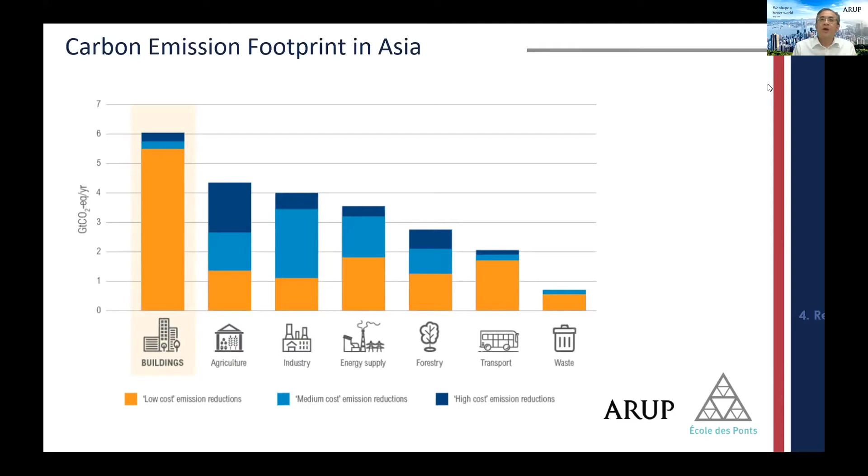So it's not difficult to imagine that in a city in this world, you have this kind of composition of the carbon footprint. Although industry and also agriculture, to some extent, form some part of the footprint, still for those more developed economies, buildings will be the key sector that emits a lot of carbon. So if we want to help curb and reduce carbon emissions, buildings will still be the key focus.

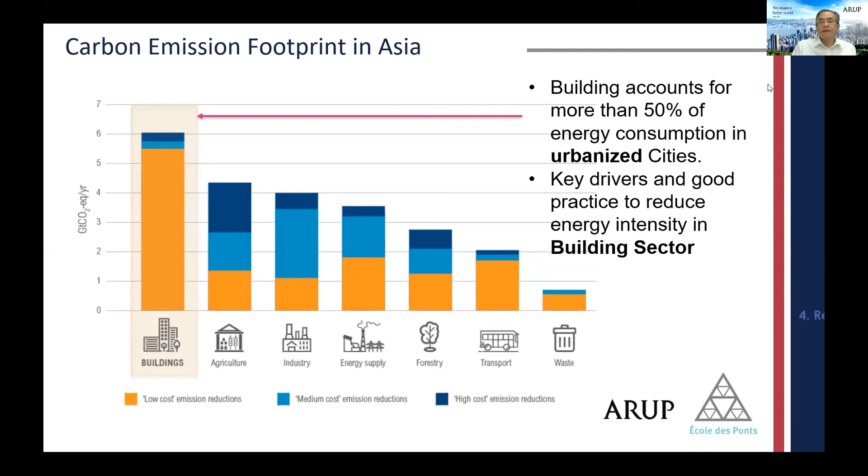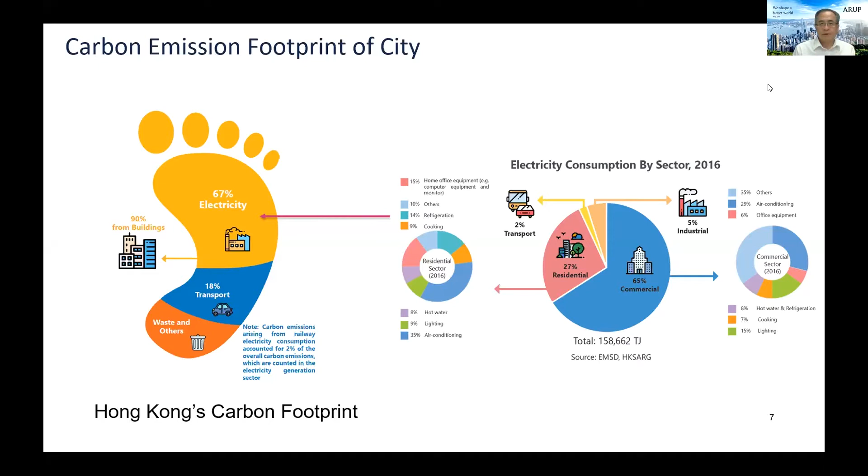And in particular, if you look closer at electricity consumption, you can find that commercial buildings actually consume a significant amount of our electricity, because for an international city like Hong Kong, there is a lot of business activity happening in offices, and also a lot of activity in shopping malls. That's why commercial facilities actually account for over 60% of the total electricity. So if you want to solve the problem, we have to look into this broad perspective, and also the inequalities in how this electricity is being used within the building sector.

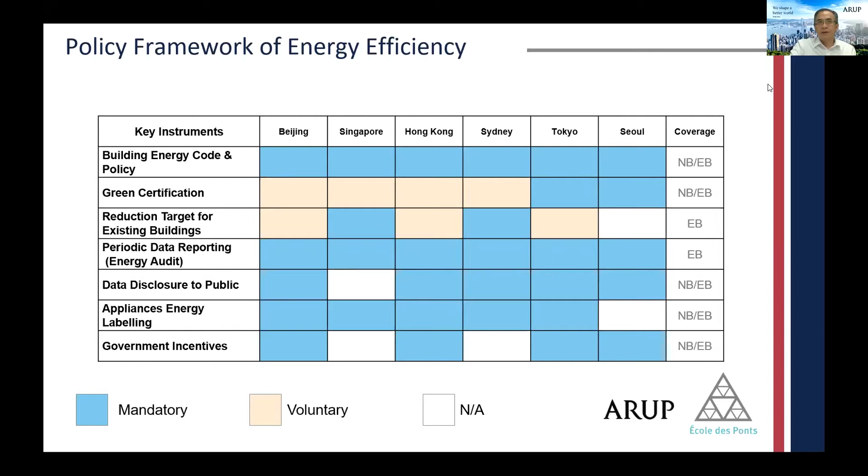That's why in this region most governments have developed policy on energy efficiency. This is a summary of the instruments they typically use, including regulations, market green certifications, setting targets for existing building reduction, and, becoming more and more popular, incentives and disclosure of energy use from buildings and at the corporate level, in order to create peer pressure for the operators to behave. You can see in the table here that different cities in this region use different methods. Some use mandatory, some use voluntary, to help implement these initiatives within the energy efficiency frameworks.

So basically, this shows the overall framework of building energy efficiency. We use, of course, building energy codes to control the way we build our built environment, and also the systems and subsystems within the building. We also incentivize the market to create green building measures, and more recently, for existing buildings in particular, to create a market whereby building operators or building energy operators have the chance to invest in order to retrofit and commission the building and maintain it to a very high standard.

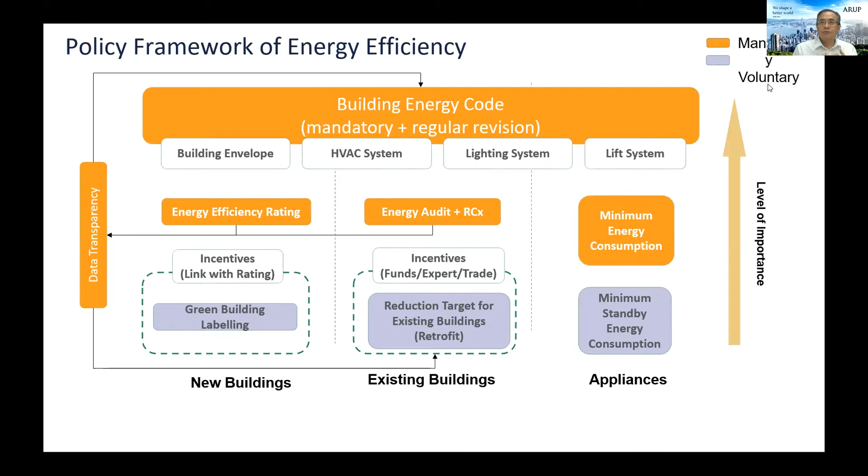Bear in mind that in this region, over 60%, over 80% of buildings are below the current energy standard. So we still have a long way to go to make these existing buildings perform as well as the new buildings. These are some details on the instruments that have been used in leading cities in this region.

In Japan in particular, you probably have heard that they use CASBEE to help plan and design green buildings. They use the Top Runner program to encourage building owners to reduce carbon through voluntary disclosure of performance, and more importantly, the Tokyo Metropolitan Government introduced a cap and trade program whereby buildings can trade the energy savings they generate from the initiative. It actually proved to be very effective. We were told by the local authorities that over 30% of energy has been reduced because of this cap and trade program.

In Singapore, of course, they also take quite proactive measures to control energy and building design. Green Mark is a green building certification exercise. They also have a very stringent energy code, which helps to reduce the energy used by new buildings. And more recently, they introduced the super low energy building scheme, where they encourage building owners to take extra measures to improve existing building performance.

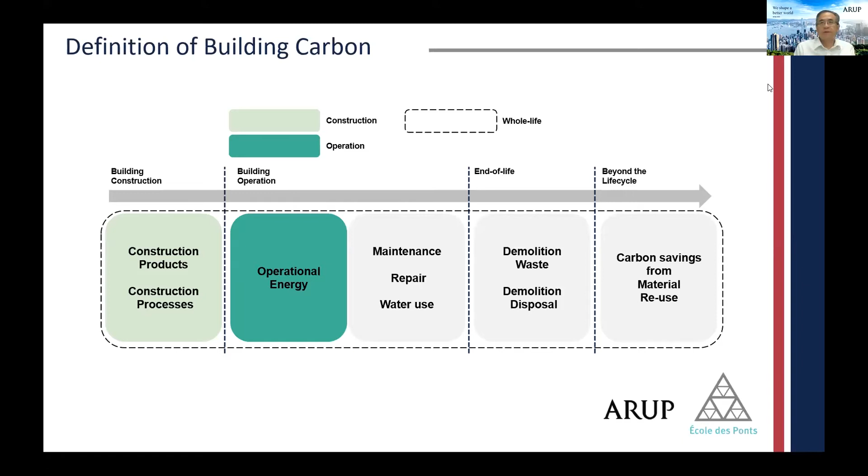But we still need to face the fact that around 50% of the carbon is embedded in the materials we use. So when we talk about net zero, we are not only talking about offsetting the operating stage. We have to think about the embedded carbon as well. So overall, we are talking about a decarbonization process to the state where we create what we call an energy positive building, meaning that the energy generated throughout the operating stage also has to offset the embodied carbon in the materials.

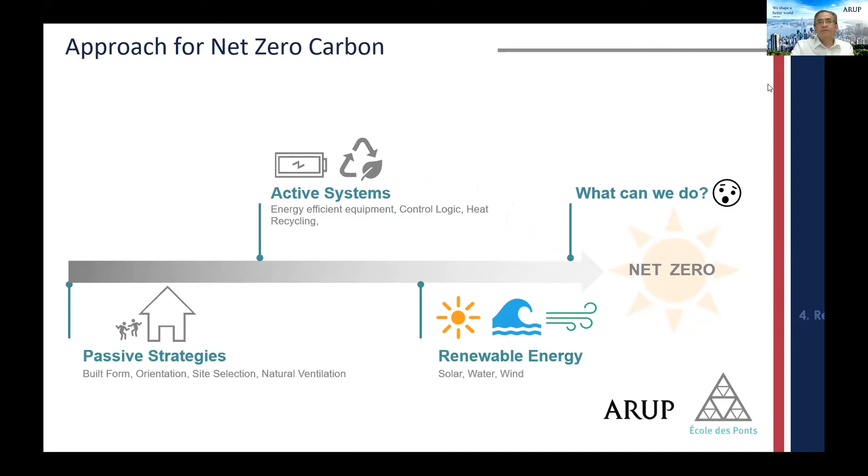So there are a lot of methods and standards being developed, as I said, in this region and worldwide, to help designers, engineers, and building operators take this on board in the design and operation of the system, including passive strategies, active systems, and renewable systems. But there's something we have to work more on in order to achieve that. It's shown by this diagram that we have to work from both ends.

First, we have to reduce. That's very important, and based on science-based calculations, we need to reduce at least 60% of our current operating energy demand across the whole building sector, be it residential or commercial. So it's actually very challenging. Bear in mind there is still residual energy needed to provide the basic necessities that safeguard the health and well-being of people. So that 60% is very challenging.

But on the other hand, equally challenging is to increase renewable energy supply. If you look at the built environment, in particular developed cities like Hong Kong, Singapore, Tokyo, Taipei, or Beijing, it's very difficult to install renewables in the city. So we have to find some other way, and later I'll show you an idea we generated recently to maximize the available provisions to create renewable energy.

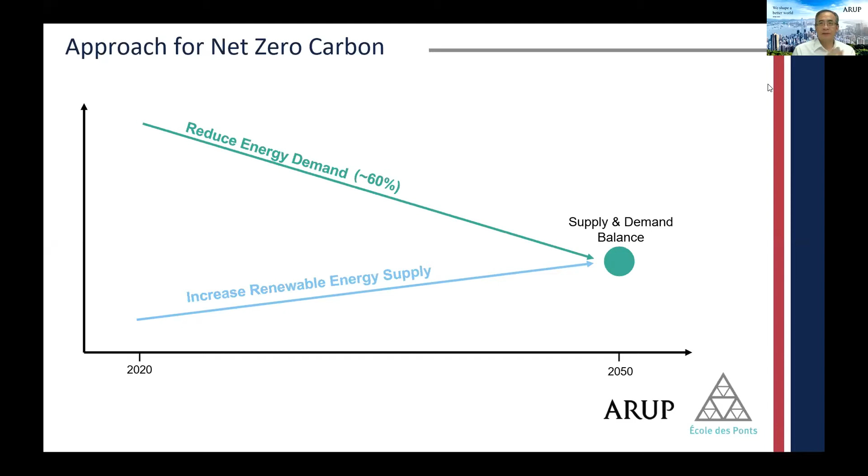So the end game is that by 2050 we will approach a balance between the supply and demand efforts in order to achieve the zero carbon objectives. So just quickly, let me give you some idea of what has been done in the past decades on this zero carbon front. As I said, zero carbon building is not new in this region.

In fact, this is the first zero carbon project I worked on, 10 years ago, for Samsung. The company built this demonstration project called Green Tomorrow, to demonstrate the technology to achieve zero emissions, both in energy and in waste, solid waste and liquid waste.

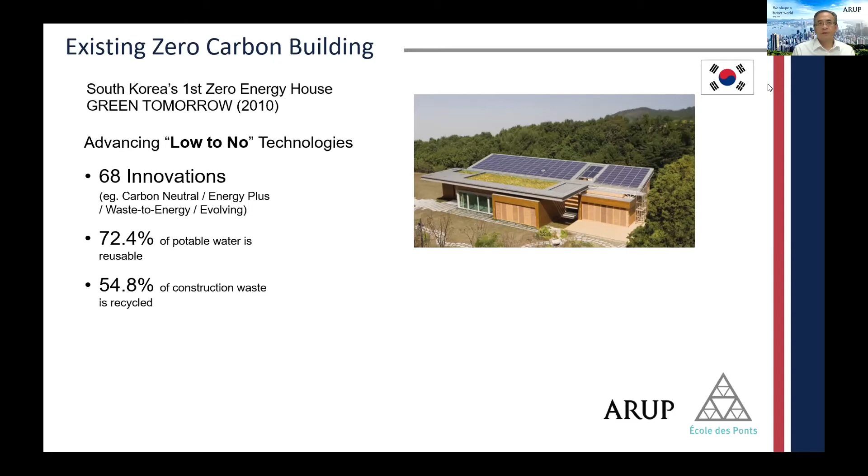So that's why in design we try where possible to maximize the use of passive design, to use natural ventilation during the mid-seasons, and in the winter seasons to introduce as much solar as possible into the interior space. And on the active system, we use a ground source heat pump to provide heating energy during the winter time.

So overall, the building can actually achieve zero carbon performance with the aid of PV and also a small wind turbine, to achieve zero carbon operations year round. But I think the trick is still that we need to bring down, as I said, the demand. Without this kind of exercise, it is hardly possible that the PV on the roof itself can provide enough electricity to drive all the systems needed to decarbonize the residual energy use.

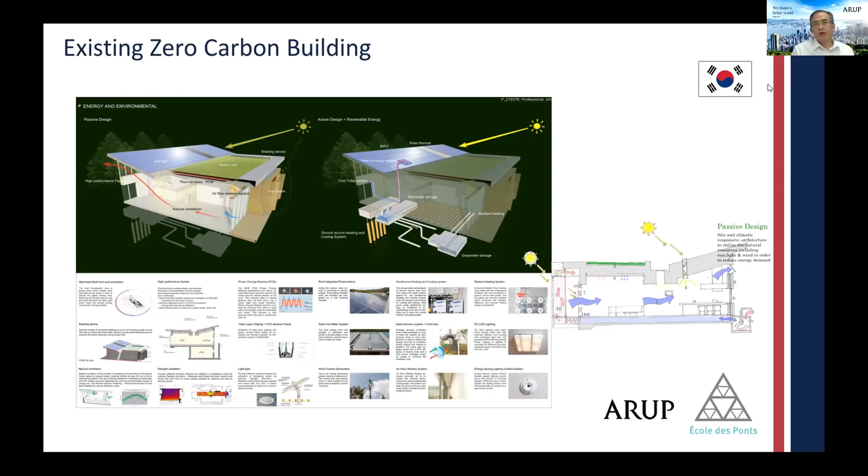This is another project done almost 10 years ago in Hong Kong. This is a low-rise office building. We call it ZCB, Zero Carbon Building, in Hong Kong. Here again, we want to move from the concept of low carbon. As I said, the government here has introduced a lot of low carbon requirements and also low carbon design adopted in the industry. But if we want to move down to zero carbon, we have to work further on that.

In particular, we actually have adopted behavior change. I think that's important. In the old days, when air conditioning was not that popular, we used a lot of natural ventilation. But we find it quite difficult these days to promote this because people's behavior or culture has changed. In order to achieve zero carbon, we have to reverse that process.

So that's why in this particular project we introduced high volume low speed fans in order to provide thermal comfort, and to decarbonize the whole thing. Because the facility is a place for offices and also exhibitions, we have to get a continuous supply of electricity. So for that we rely on biodiesel, biomass kind of energy. We actually introduced the first, I would say, biodiesel powered by waste cooking oil to provide the energy for that.

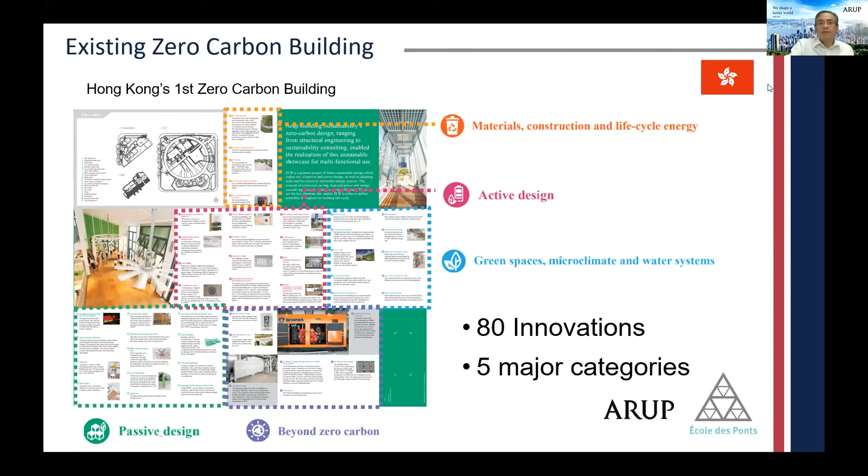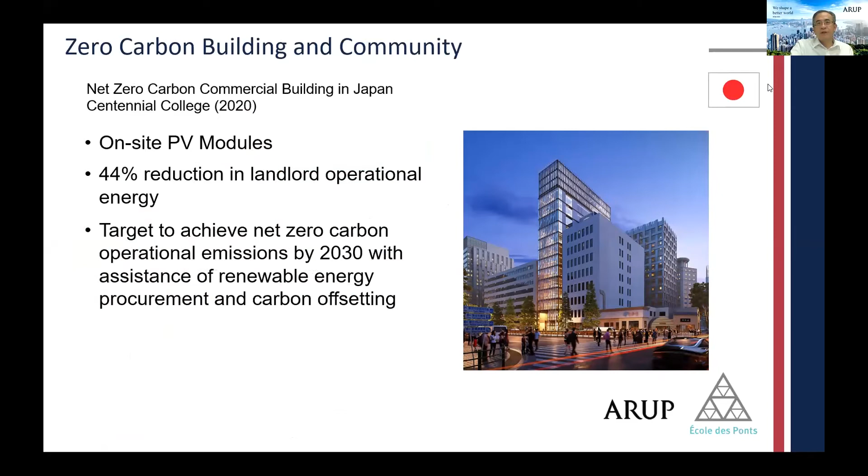So in total, the PV on the roof provides around 30% of energy, whereas the remaining 70% of energy is provided by the biodiesel or bio energy. Another zero carbon building is in Japan. In the interest of time, I'm not going into details, but they're also applying a lot of technology to arrive at that. So we know that a lot has been done in the past, but what about the long-term decarbonization situation of the entire society?

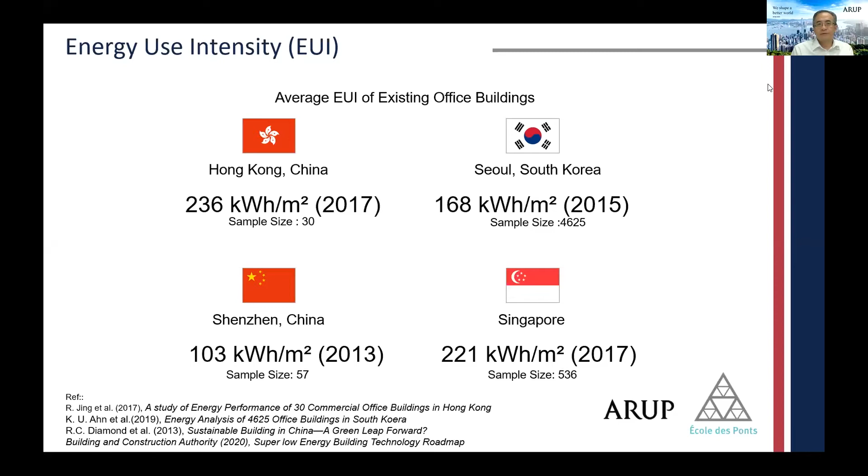If you look at this, it actually tells you the truth that the future doesn't look that promising at all, because buildings still use a lot of energy. These numbers are the energy use intensity in Hong Kong and also in Korea and Singapore. The climate is an issue, and more importantly, as I said, the living quality or living standard has improved significantly during the past few decades. That's why the EUI keeps on rising in the past few decades.

So in order to achieve zero, we have to look at it in a more scientific way. Assuming that we have to get to the 2050 zero carbon objective, we have to work from this trajectory. So the industry, and in particular the professional institutions here, including the Green Building Council, where I'm one of the directors, is developing this kind of science-based decarbonization trajectory pathway for the industry to decarbonize.

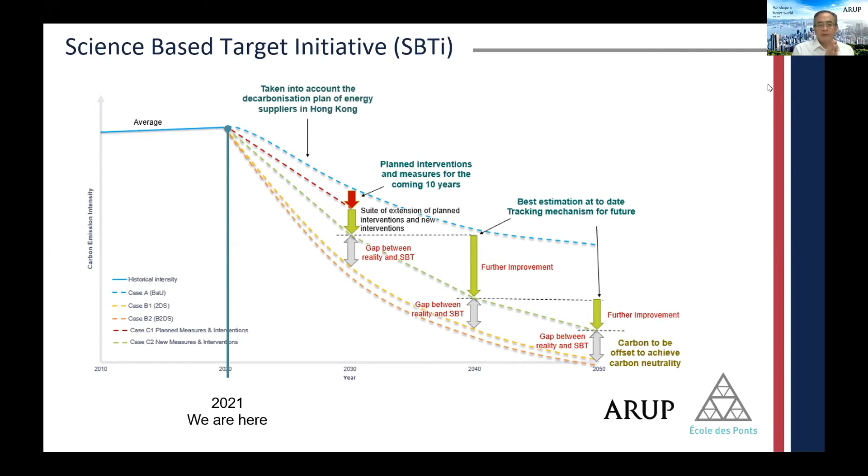So you can see that we still have a lot of gap to get to zero. At different junctures, we need different measures, and those measures have to be underpinned either by regulations or facilitated by the industry to implement. That's why, other than using the science-based targets pathway, we have to develop this roadmap. This is equally important.

There are many economies in this region that have developed this kind of roadmap for buildings against the instruments I've just mentioned. Gradually you'll see convergence across different economies using these frameworks, including the one developed by the Global Alliance for Buildings and Construction, whereby they create short-term, mid-term, and long-term policies on the instruments I mentioned.

But what's different is if you look at the EUI (energy use intensity), they're different. Some are starting from very high levels and need very drastic measures, whereas some countries that are doing quite good, in particular China and others, are starting from relatively low EUI. So the extent of the measures varies whether within the economy or cities. For new buildings we have a set of standards, and existing buildings, as I said, are equally challenging - we have to start from there.

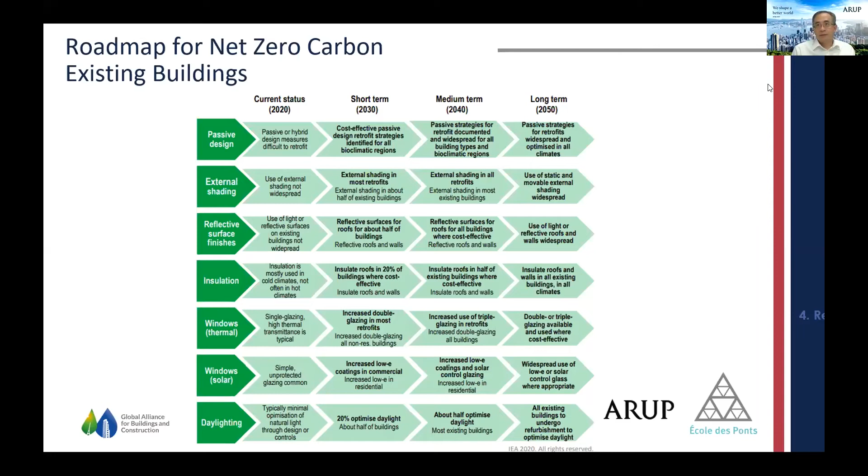What we learned in the past few years is that many of these challenges can be handled by changes in the behaviors of building operators, and more importantly, the behaviors of corporates - when they procure, when they manage assets - in order to encourage partners, be it contractors, developers, investors, or tenants, to work together to get synergies to arrive at zero carbon. Existing buildings are quite difficult - you have to start not just from the hardware, but from the behaviors, and more importantly, the synergy created from different stakeholders.

So quickly, moving further down the line - what's next when we talk about the next wave of this decarbonization process? We know that inevitably we have to think about carbon capture or sequestration schemes. We know that we need to develop smart infrastructure which not only decarbonizes the building, but also the entire system - from transport, and also from the waste that we generate - in order to achieve that ultimate goal.

This is becoming a hot topic in this part of the world, to create more clean energy. We know that algae is very good at absorbing carbon dioxide. In fact, a lot of labs and school research centers here have studied how we can harness or capitalize on these hydrocarbons and convert them into biofuel. I mentioned earlier that the zero carbon building we operate in Hong Kong actually uses biodiesel, which, with the help of industry, can be generated by this algae.

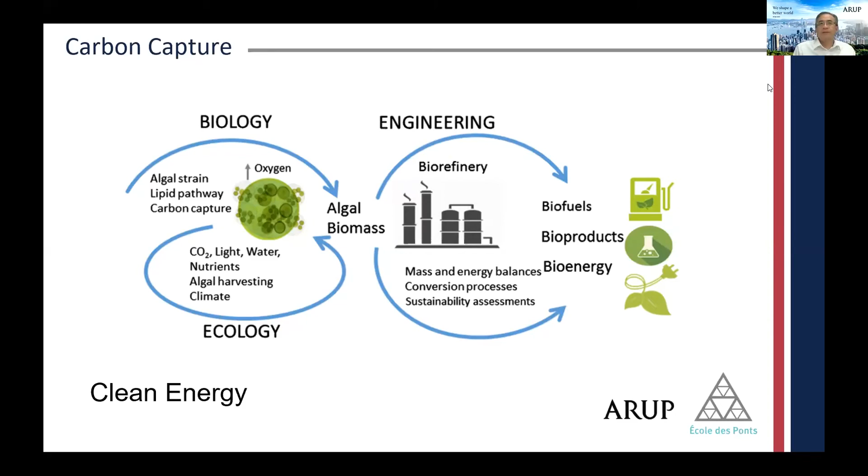So algae can also be integrated and embedded into our building system, in particular on the facade. These are products made in Germany and patented - we work together with our partners. This actually serves a dual purpose: first, the algae helps to shade against solar, and at the same time, while being cultivated, when harvested that algae can be converted into fuel which can be used for other purposes.

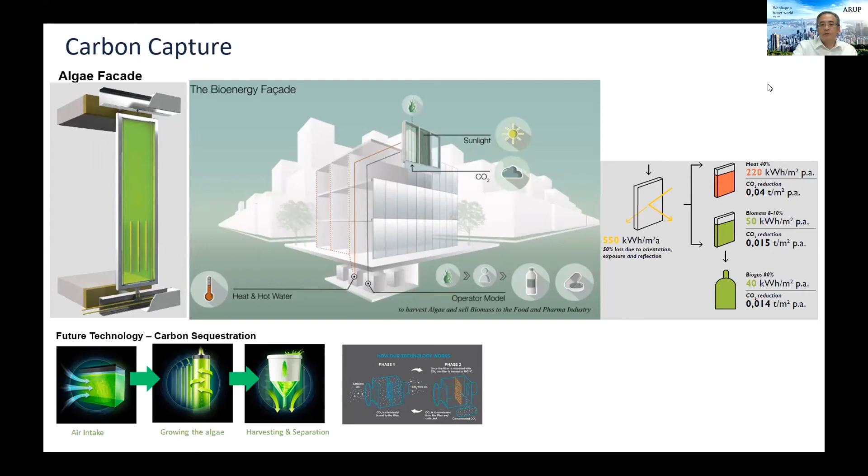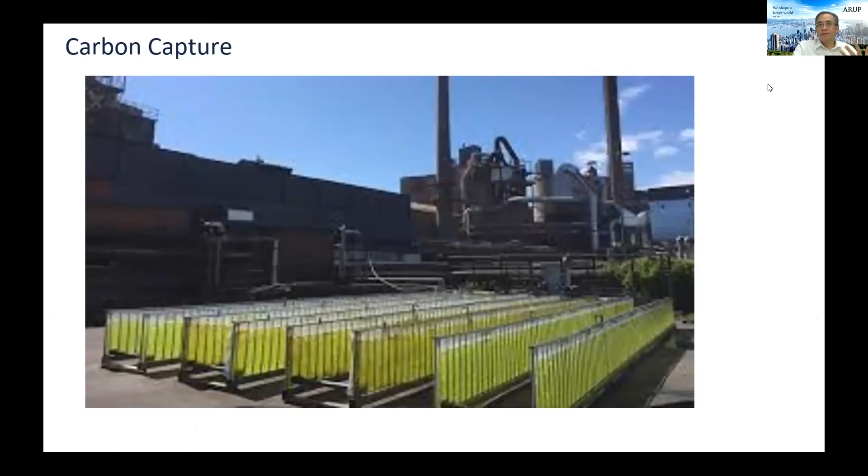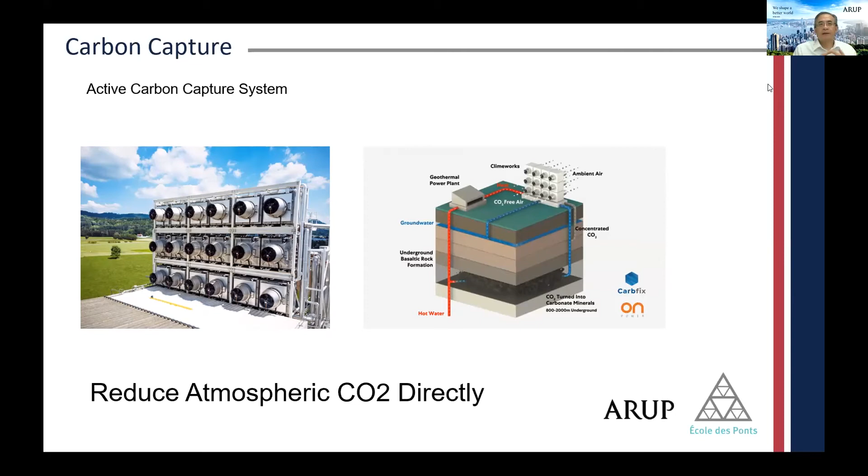Low carbon infrastructure is also very important, in particular digital technology, which will actually be seen as a hope for many industries. In the building industry in particular, AI and smart digital energy management are becoming prevailing. Most leading developers, building owners, or asset managers, when they manage their portfolios, will use this kind of digital management system, like the one we develop for our partners.

We call it Neuron. We help to manage the operation of buildings. It's not only about visualization of energy use, it's more about using AI or machine learning technology to optimize the use of a facility. More importantly, it's about informing and advising the user how or where they could help reduce energy in daily operations.

These are becoming more and more popular with the help of BIM, Building Information Modelling. This kind of technology is becoming more and more powerful. These days, with the inclusion of IoT, preventive maintenance or other predictive operations are becoming more and more feasible. So there's actually a way out for our existing buildings to revitalize or regenerate them, and more importantly, to sustain them for much longer time spans.

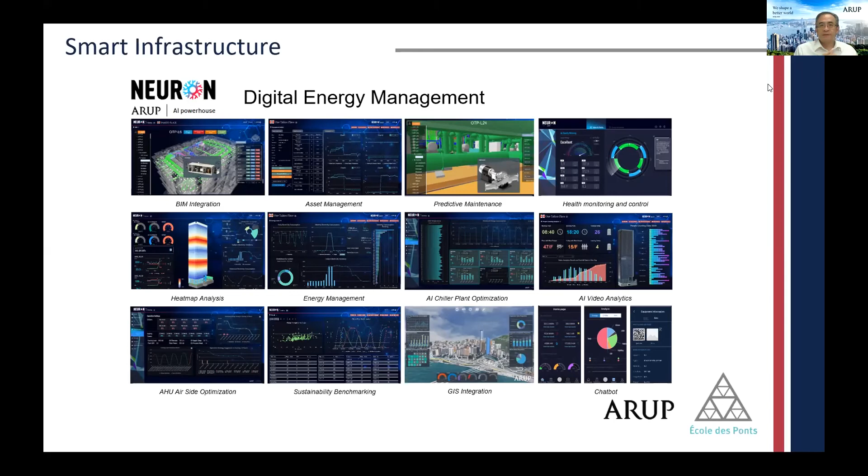I'm not sure whether we could still keep a building young for 100 years, but definitely with the help of this kind of technology, it's not that difficult to maintain our building systems at their highest, most energy efficient standard. Of course, there are some other district level systems that can help reduce energy use.

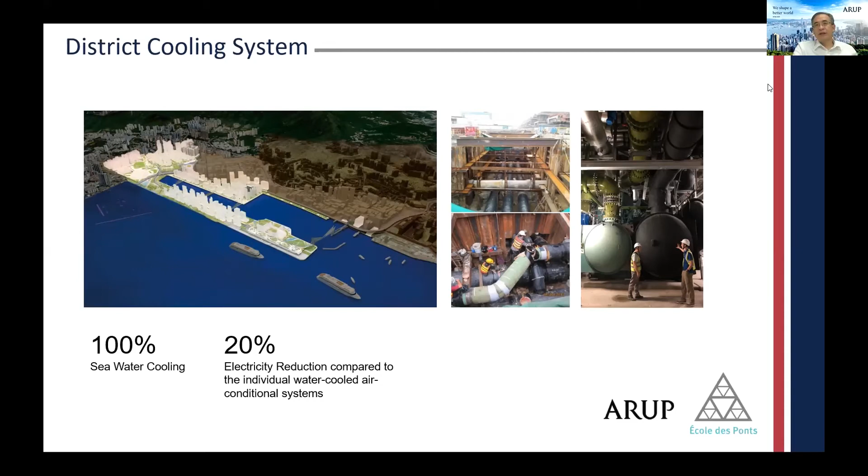Including district energy systems being implemented widely in Singapore and also in Hong Kong, where, as I said, air conditioning accounts for over 50% of energy used in commercial buildings.

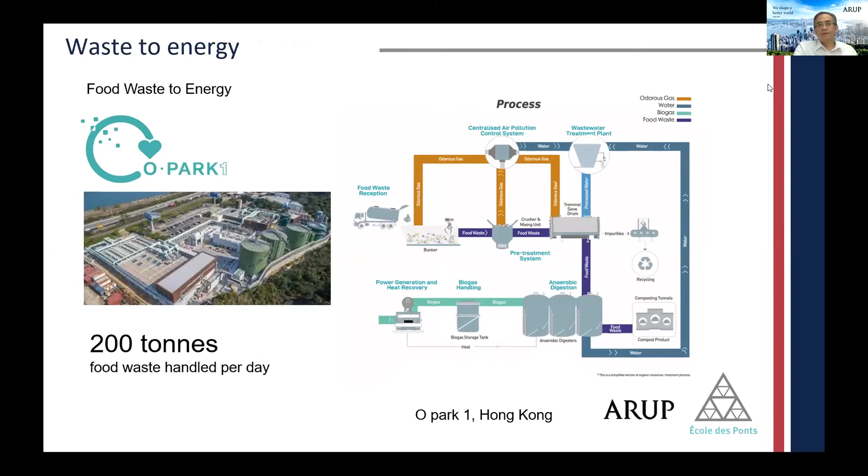Likewise, more and more projects or initiatives can be found in these regions on handling waste, organic waste, food waste, and also sludge, the waste water that we generate daily, and converting part of that waste into energy.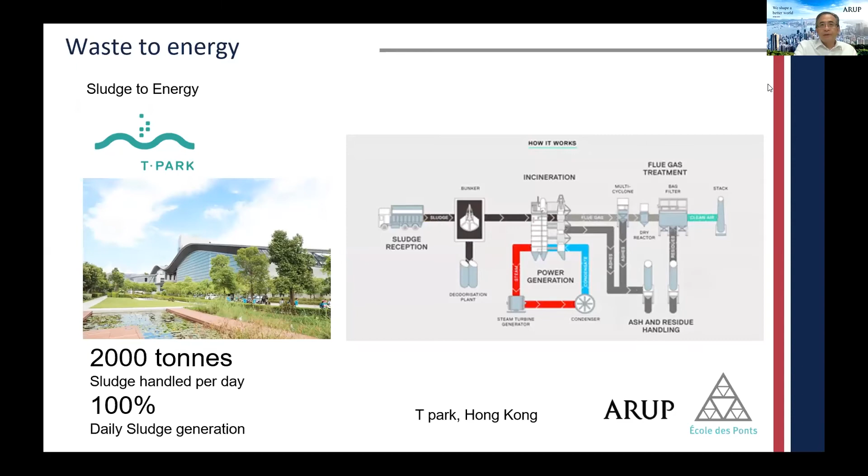I think more likely in the future we will not only rely on hydrocarbon. I think what we need to rely on, or switch or transform into, is another new form of energy source, which is hydrogen. I think globally, if we take 2050 seriously, hydrogen technology is something inevitable.

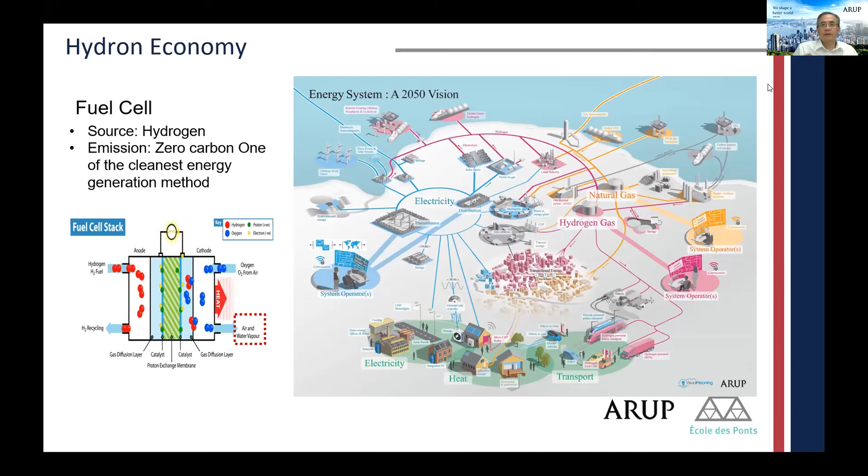So this year, in particular the recent years, with this vision, a lot of research and pilot projects have been put in place to test this technology. But of course we still need to address the issues of availability of green hydrogen, and more importantly, how we could address the issues of health and safety, which I think is a major concern for the public, if not the controller or the government.

So I hope I could answer these questions. Of course, as I said, this is only the beginning. We could not have all the answers in a day or two. It probably will take us three or four more decades until we can have the full picture.

Before I end my presentation, I actually have a video to share with you, in Arup, showing how we see the future of building will look like.

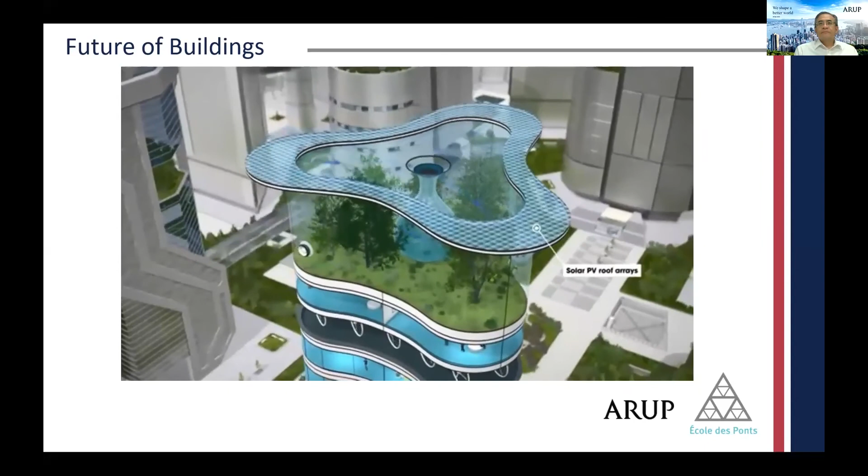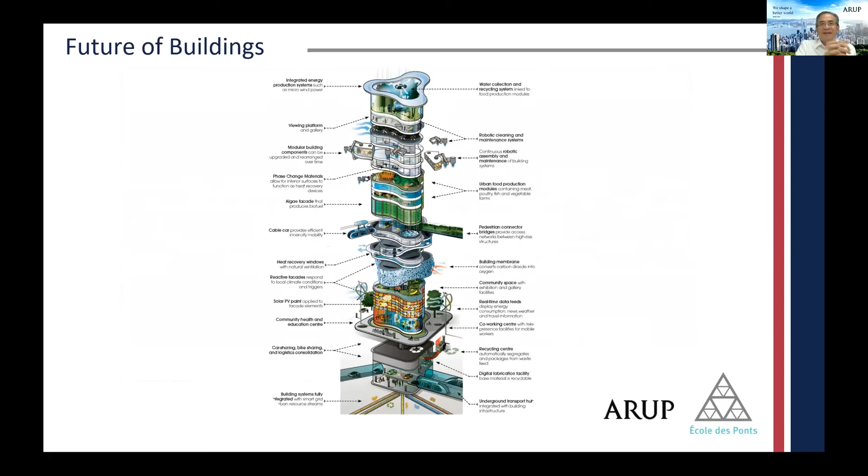So I hope you will like this. Basically it's our vision of the future, and it compiles a lot of ideas of how the future of buildings will look like. These can be downloaded from our company website if you're interested, so by all means have a look and see the details. So thanks all, this is the end of my presentation.

I'm happy to take any questions from you.